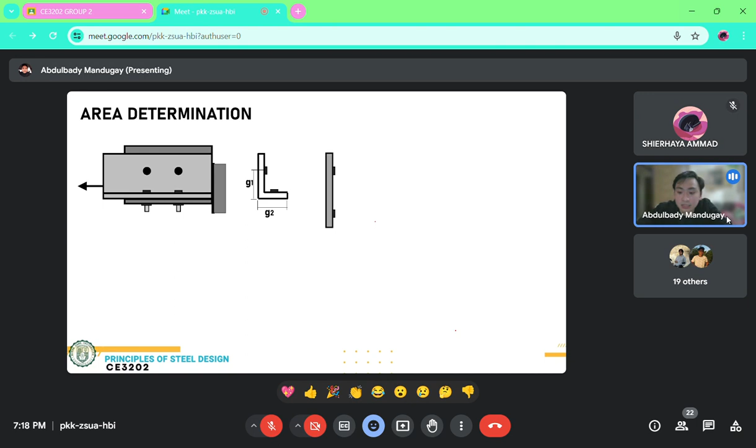And this distance, itong distance na ito, this will now be our G distance, or yung transverse distance natin. And this transverse distance is equal to G1 plus G2 minus the thickness. Okay, so yan lang yung magiging formula niya. Magkakaroon siya ng new distance. So that's just G1 plus G2 minus the thickness of the plate.

Kung ano yung thickness niya dito, and equal lang naman yan ang thickness. So that's just G1 plus G2 minus thickness. Pag may value na tayo nito, we can now compute for the net area. The net area is the gross area minus lang natin yung ito. Okay. So, ganun lang siya ang special provisions if angles.

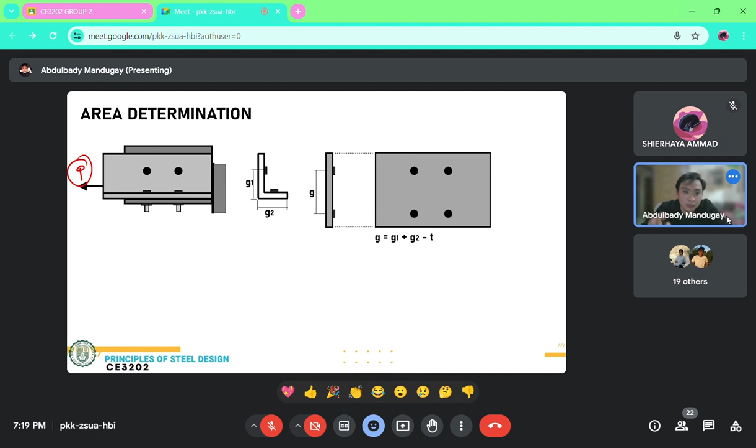But this will only be applicable if the P or the load is being applied at the combined neutral axis of all the bolts. Kasi pag eccentric siya, that's a different story. We'll be dealing with that later on. Pero for now, we'll be tackling only those with tensile forces acting on the combined neutral axis nung lahat ng bolts. Okay, so ganun lang siya.

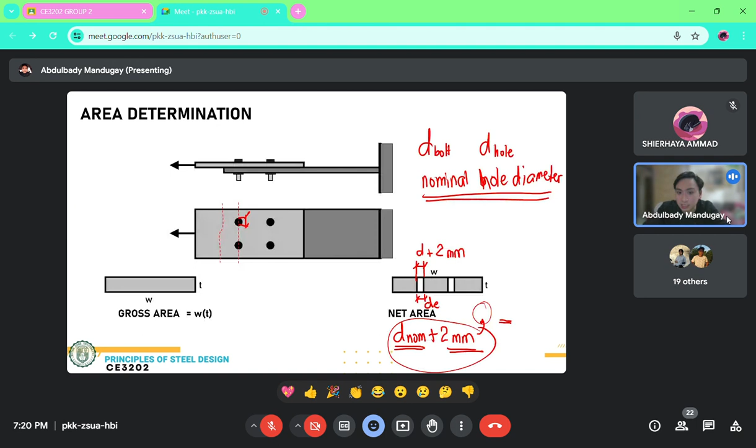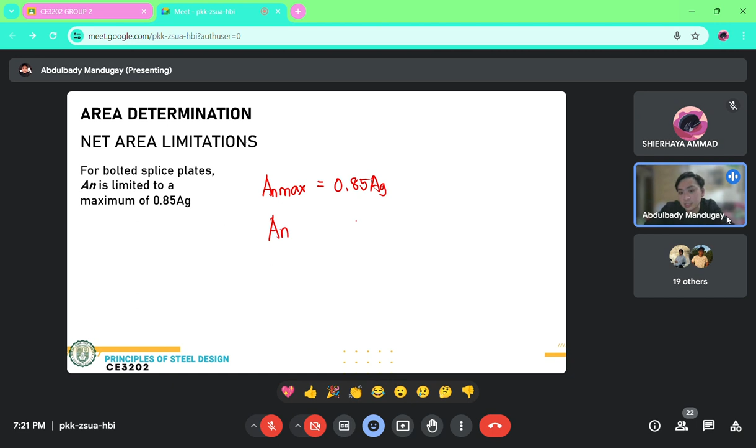So, kapag splice plates, we have to consider the maximum allowable value for net area. So AN maximum should be 0.85 AG. So yung net area natin, dapat hindi mag-exceed dyan. Yung net area natin should be less than or equal to 0.85 AG. Now for example, meron kayong sinolve na plate or splice plate, and then pag compute nyo ng AN, let's say for example, 4885. Okay.

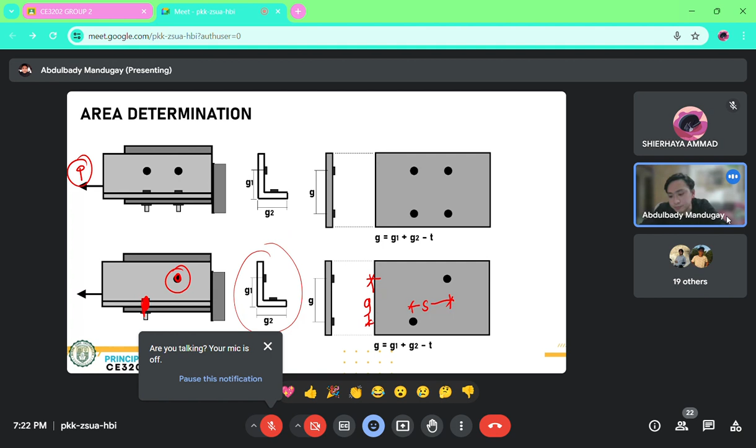Sa formula natin, for rupture ng effective area, Ru should be less than or equal to reduction Rn, di ba? And Rn is equal to Fu Ae. Ae yung nasa formula. Ae refers to the effective area. Anong effective area? Effective area is just the net area multiplied by the shear lag factor. Okay? Yung shear lag factor ay nasa code lang din.

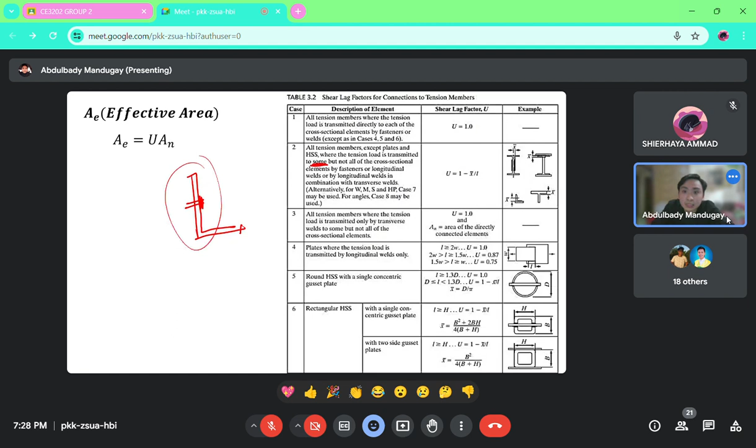Where tension load is transmitted to some but not all of the cross-sectional elements. So, ibig sabihin nito, kagaya nung I-beam kanina, or yung angle na ang nakafasten lang is yung isang leg. So, pasok siya dito kasi tension load is transmitted to some. Ang ginamit dito na some is one leg, but not all the cross-sectional elements. So, pasok siya sa case 2 kapag one leg lang.

So, ang formula ng U niya, kasi kanina yung sa case 1 pala, ang U niya is 1. So, masyadong madali na lang. For now, case number 2, medyo complicated. We'll discuss this pag nagkaroon na tayong sample problem na hindi plate, or specifically I sections or wide flange sections.

Case 3, all tension members where the tension load is transmitted only by transverse welds. So, welds, hindi pa natin. Okay, so case 1 and case 2. Case 7, kasi 3, 4, 5, 6 ay pang welds. Case 7. Baliktad. Wide flange. I-beams lang po lahat, or T's cut from these shapes.

So, if meron tayong wide flange or yung mga I-beams, dito tayo titingin. We have to compare this or this, kung saan ba pasok yung cross-section natin, para malaman natin kung dito ba tayo magre-refer. And then, pag angles naman, dito tayo titingin sa case number 8. Ibig sabihin, kung plate, automatically 1 na yun. Other than plate, we have to check doon sa ibang cases. Basically, yun lang naman yung shear lag factor. We have to refer dito sa section.

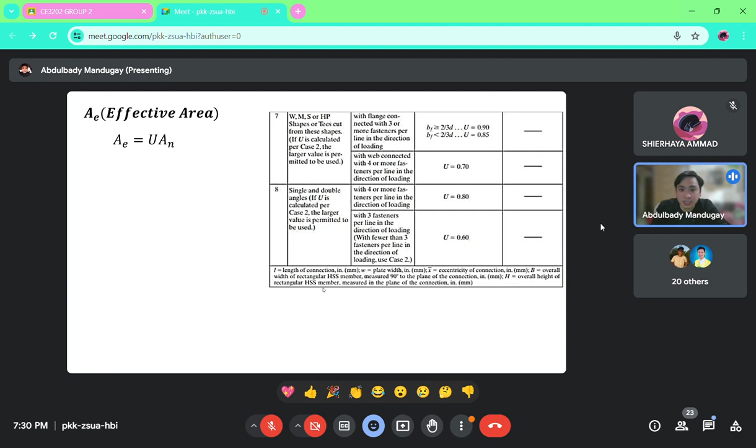Are there any questions? Nasusundan ba ako? So, it's already 7:30. Hanggang 7:30 lang naman tayo. Let's start solving some sample problems tomorrow. But I will be giving plates in advance, kasi mas mauna yung plates natin. I'll just set the deadline the next day, para may time kayo ma-apply yung sample problems natin. For now, let's end the discussion here sa concept ng shear lag factor, and then apply natin next meeting on some other problems.

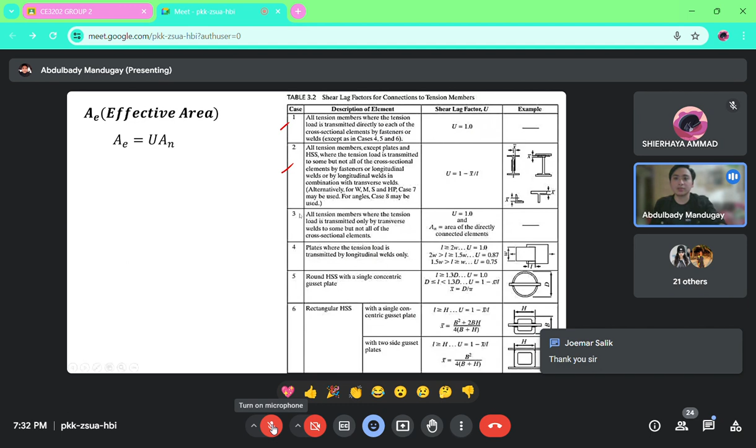Sir, ano pong reference book ang gamit ninyo? I-post ko na lang sa class. I'll post the material na ginamit natin para doon sa introductory part para ma-grasp ninyo lalo. Reference book, marami. You can also use reference materials from other centers. Pero kay McCormac yung gamit ko ngayon.

McCormac ba? Ha? Yan ang teacher. Akala ko estudyante. Lagi yan, sabi ko estudyante.